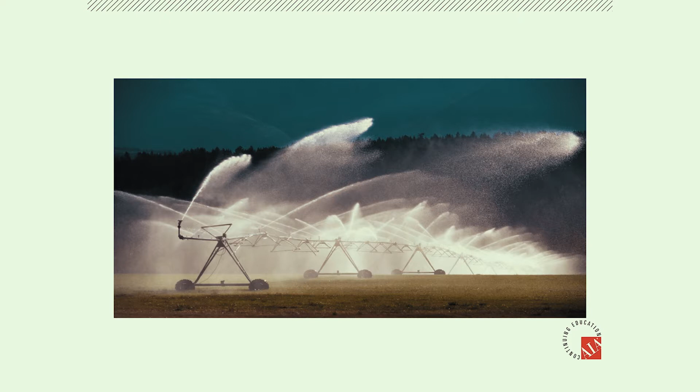Here we are, agricultural community all around Florida. We use water to irrigate our crops.

Hospitals, we've all been in hospitals. We use water for the hot water, for the cold water, for the heat, for the air conditioning. We use water as a tool inside a facility.

Universities, we've got dorm rooms, we've got kitchens, we use water as a tool in a university. High-rises, condos, apartments, coliseums - we use water as a tool in all these different types of facilities.

So now the question is, how much water do you use? We're going to look at a couple applications to bring you up to speed, to put everything in perspective of how much water we actually use.

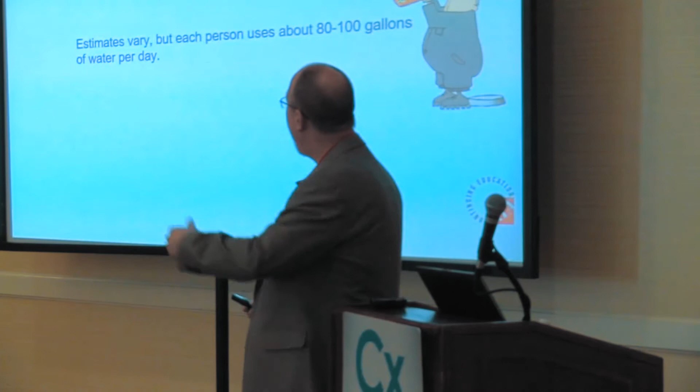The question I ask you is, how much water does the average person use per day? Any suggestions? 35? Anybody over here? How much gallons of water do you use a day? 100 gallons a day - it makes a lot of ice cubes. The average person uses 80 to 100 gallons a day. Bingo, that's a lot of water.

Gone to the grocery store, get a jug of water - how would you like to carry 100 gallons of water? Pretty hard. So in this case, 100 gallons of water per person per day is a lot of water.

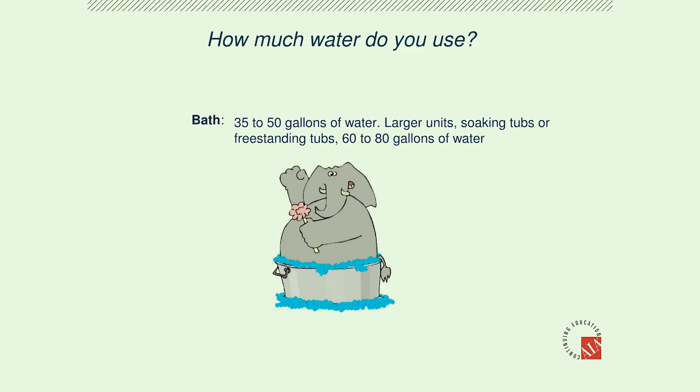Let's break it down to a few typical applications. I'm going to take a bath. How many gallons of water do we use to take a bath? Anybody over here, what do you think? Come on, Henry, have you ever taken a bath before? No? Oh. 25 gallons? Any other suggestions? 35? 35 to 50 gallons of water fill up the traditional bathtub.

You've got your hot tubs and your freestanding tubs - you can use a lot more water than that. That's a lot of water. Then the old argument comes in: is it better to take a bath or a shower?

Showing a shower there, the average shower is 5 gallons per minute. If you're in for 10 minutes, that's 50 gallons of water, the same as a bathtub. So it's all relevant to how long you do it, how much you put in there.

Now you can see why the hotels are putting in those water-saving heads. It's a tremendous amount of water that can be saved. I wouldn't use it at home, but in a hotel...

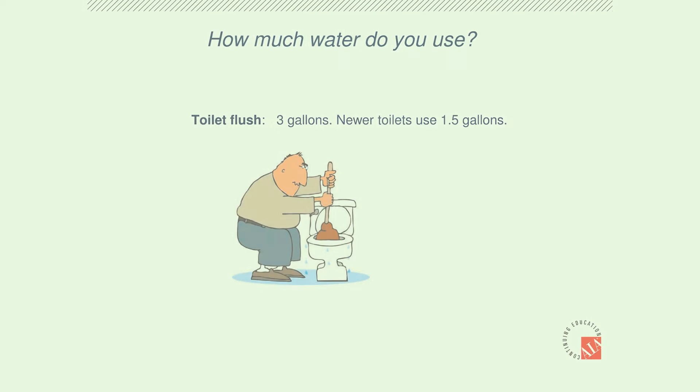So there's a shower. Now, if you don't use the bathroom to wash, you're going to use the bathroom for the toilet. Everybody flushes the toilet a couple times a day. How much is in the flush? How many gallons of water is in the flush? Depends on the age of your toilet.

The average toilet that you find today is about 3 gallons, and the newer toilets are 1.5 gallons - especially after a night going to Taco Bell there.

And then how many times do you flush it? I'm a couple flush - I like a clean bowl, then a couple after. That's a lot of water just from a toilet, all down the drain.

Well, the dog usually uses the toilet as a water bowl. The dog also helps out in the kitchen from time to time.

I have this argument with my wife all the time. She says it's better to wash the dishes by hand, we're going to save water. And I'll say, use the dishwasher. We got this brand new $1,000 dishwasher that does and sings songs, does anything you can imagine. Let's use that. She says, no, it's better. What do you think - dishwasher, washing by hand, what's better? Dishwasher? You're right.

The newer efficiency dishwashers use about 6 gallons, while some of the older ones use maybe 16 gallons. Washing by hand depends on how long you've got the water running, but on average, washing dishes by hand is going to take more time and use more water down the drain.

So we move off from the private sector into the commercial sector. You can see from up here, the commercial segment of the industry in the USA accounts for 17% of the public water supply in all those buildings we just looked at before.

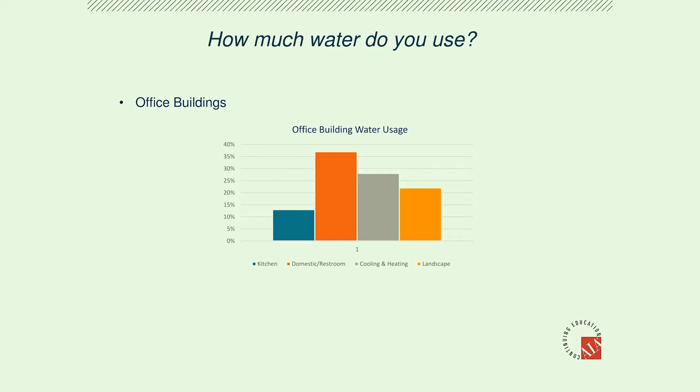Let's break it down and look at where they use water in these types of facilities. In an office building, they're using about over 35% in domestic and restroom use, and cooling and heating is over 25%. That's where all the water's going in most office buildings. Most people say, what water? There's someone in the restroom, maybe you wash your hands and get a drink. They have no idea what's inside the building.

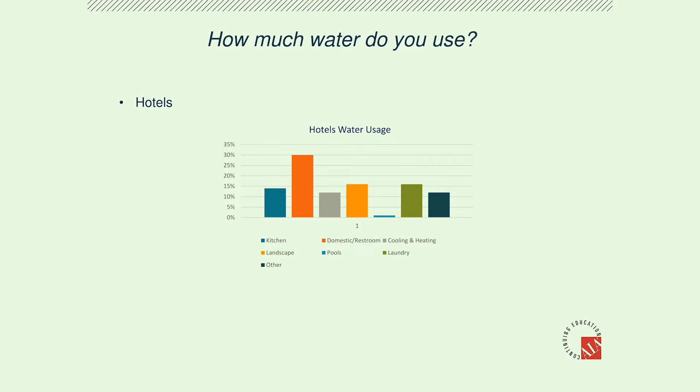Educational is a very new prime category that everybody in this room is spending a lot more time on, balancing and commissioning universities and educational facilities because there are a lot of energy concerns. And guess what, they use a lot of water. Most of it's domestic and restroom, some cooling and heating, some laundry there. They use a lot of water.

Henry asked, why is the percentage so high on cooling and heating when most of it is recirculated? The internet never lies, Henry. I don't know, that's a good question. A very good question. And that's why you're balancers, you're there to find out the answer to that question.

So the question we had, as Henry brought up, where's all the water going? Why do we need to monitor all the water? Don't we have enough water for everything possibly?

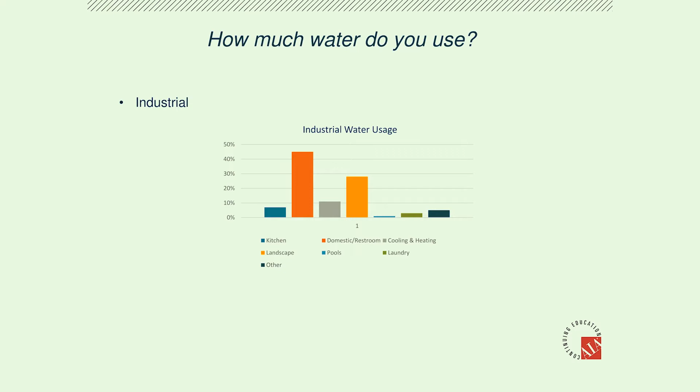Well, no, we actually have a finite amount of water on this planet. And basically, yes, it's recyclable. The sun heats up the surface of the earth, and all the moisture goes up to the clouds, and then when it gets cold, it builds up and it rains. It rains down onto the groundwater and back through the whole channels again. So you would think that's an endless cycle, but the rain in Spain falls mainly in the plain.

What if you're not in the plain? What if you're on the west coast the last couple of years? Although California's starting to have a little rain there, they didn't have rain for a long, long time, so they had a drought condition. So although it recycles, it may not recycle, it may not rain on your parade, so you may not get the groundwater you're looking for. You may have to bring the water in to where you're at. So the cycle is there, it doesn't affect everybody the same way.

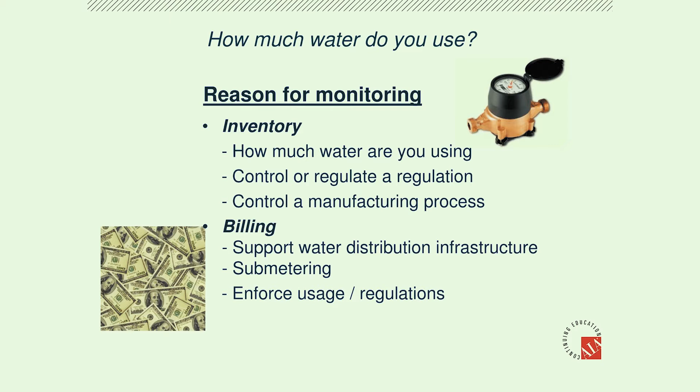So we need to monitor this for controlling purposes. We need to start drilling this down and look at some of the things that you do that affect your life. First off, we're basically taking an inventory. Remember we looked at that manufacturing plant at the beginning of the presentation.

I'm making tomato soup today, so I have a pipe of water, I got a pipe of tomatoes, I'm gonna mix them together. Wow, what's the ratio? I need to know how much water is going through that pipe. So we need to monitor how much water is in the pipe for inventory purposes.

How much are you using? There'll be some controls and some regulations in your own facility there.

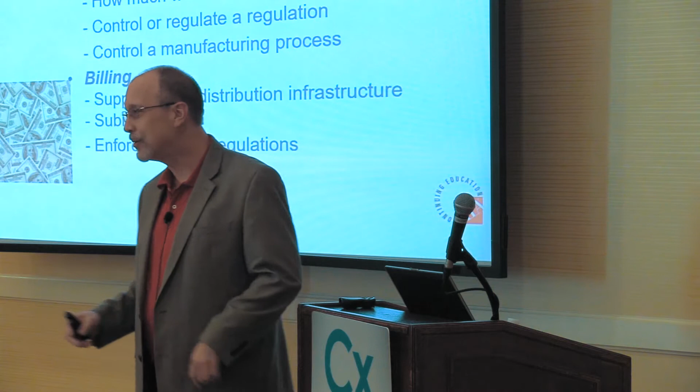Bottom line, why are we so interested in water? Money. It always comes back to money. Somebody gets it one way or the other. So we need to monitor water for billing purposes. For example, I've got to pay a water bill. Well, the water's free, isn't it? Well, it's not free. As you begin to think about that, where does the water come from? It comes from groundwater. They've got to pump it up. It's got to go to a water treatment plant. The water treatment plant's going to send it to a pump station. The pump station is going to go through some distribution network, and then you get your water. That's what you're paying for. The water's free. It's the ride from point A to point B. So somebody's got to pay for that, so there'll be a billing meter at the front door of your building taking an inventory. So money plays a role.

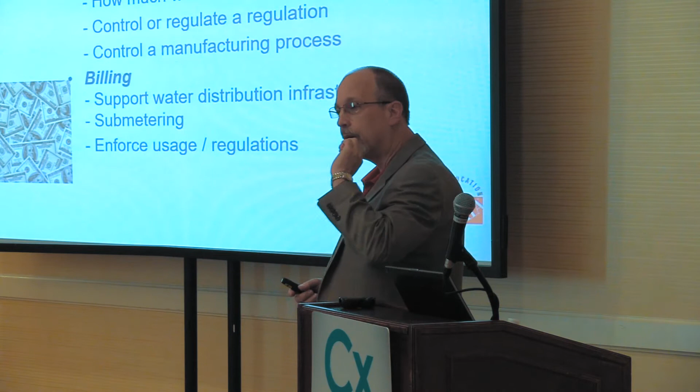So we have to support a water distribution system, and because of that, we want to share the wealth. Say I have a condominium. Well, one guy's not going to get the bill, everybody's going to get the bill. So now we have to have sub-metering on individual units. If we have a facility, a hospital, we're going to build this lab, the east wing, the west wing, we need to do individual sub-metering throughout the facility. So billing, sub-metering, and then bottom line, we have to enforce the regulations.

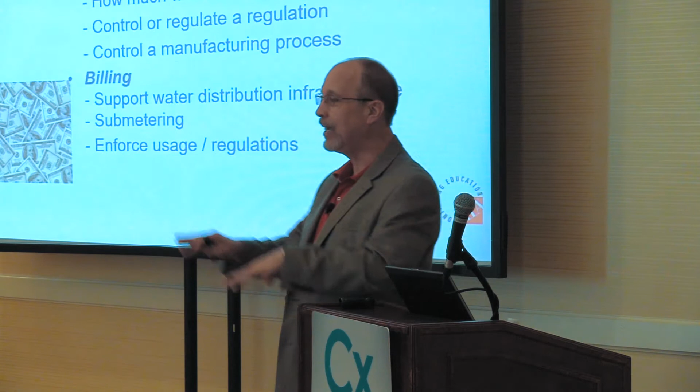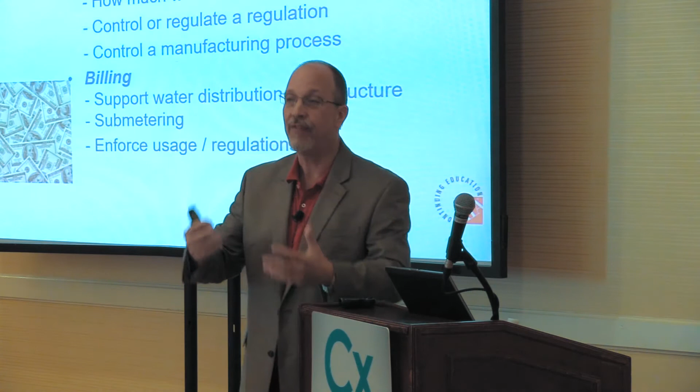When we don't have water, the rules get nasty. In certain parts of the country, here in Florida for example, a lot of people rent meters from us just to monitor their wells every year. Farmer Bob's got to have a $6,000 flow meter or hire somebody to come test his wells once a year. SwiftMud, the organization that administrates that, makes sure you don't take all the groundwater. If you go out west, we get calls from California all day long, a homeowner saying if I use over 300 gallons of water a day, they're going to turn my water off. There's all kinds of regulations because they don't have the water. So the less water you have, the more regulations and enforcement you'll have, and of course the more tools you will need to conduct that information.

So how do you determine the efficiencies of your current system? That's the biggest problem. People really don't know what they have. I'd like to do better on using water - what do you got? You might have a city water meter in there, but I don't really know the granularity within your system, how much water you're using.

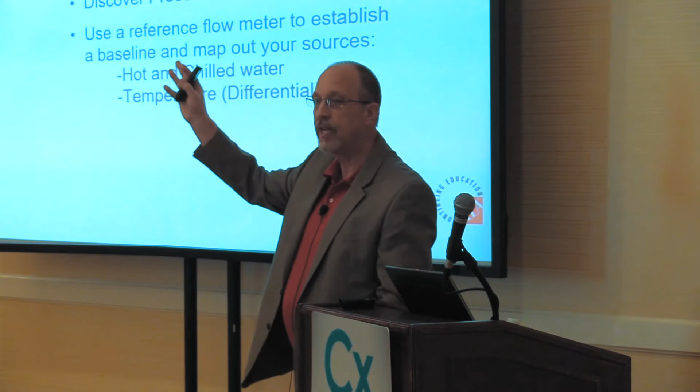So we have to go through a process which people are just finally adopting. It's called a discovery process. How much water do I have? Basically what we're going to do is map out an overall facility and look at all the different zones - this chiller, these sublines, each floor. We're going to map out the actual water usage through your process. You do that all the time when you're balancing an application. This is the big picture - everything from soups to nuts in the building. This is total water consumption of a facility.

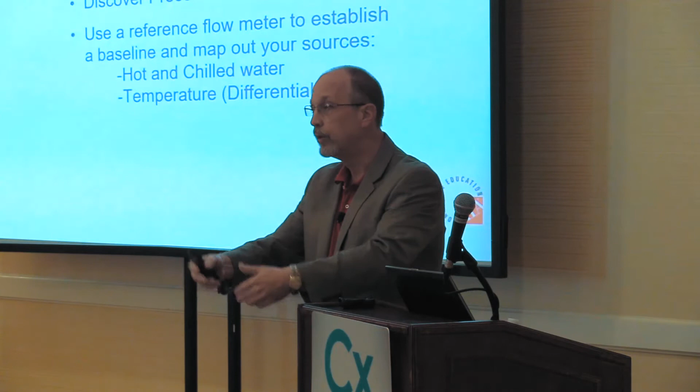We can monitor the hot and cold water, the water use, and in some cases the temperature for a BTU calculation - now we're looking at monitoring energy. As I mentioned before, the larger the facility, the more interested they are in water, which is a byproduct of energy, heating and cooling the water. So you have to have the tools to do this. We're going to talk a little bit about these tools.

One of the tools that I have been involved in uses sound and uses ultrasound.

So Henry, quick, give us a rap song. Okay, all right, that was it. That was our musical portion of the program.

Sound - a sound wave is a pressure transmission that's via either the air or water that's at a frequency that we can normally hear. We'll call that sound.

Ultrasound is at a frequency we can't hear, usually above 20 kilohertz. It's a high frequency we can't hear, but a dog can. Ever use a dog whistle? Blowing that all day long, you're not going to hear anything, but old Fido is really going to have a hard time because it bothers him. It's a different set of hearing than we have. So there's all different kinds of sounds.

The sound we use for measuring flow is ultrasound. The technology we're using today primarily is a clamp-on type device on the outside of the pipe. It sends an ultrasound through the pipe wall into the pipe, and it measures how fast the processed liquid is going. If we know the diameter of the pipe, we can calculate the volumetric flow, or the gallons per minute.

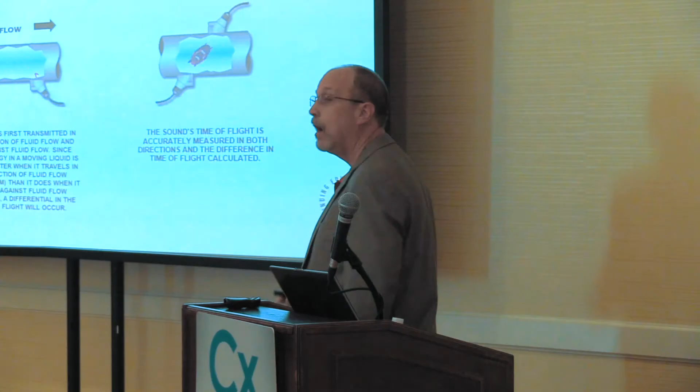Then we send a sound burst from here back to the other side of the pipe. Because it's going against the flow, it takes a longer period of time. It's like walking against a headwind - it's harder to walk against the wind than with the wind. So the faster the flow rate, the greater the differential of time.

Not to be confused with an ultrasonic Doppler flow meter, which you don't see too much today, but long ago. A Doppler flow meter kind of works like radar - it bounces off suspended particles. People in this room don't have suspended particles for HVAC-like applications. We use Doppler flow meters for applications with chunks of stuff in it, so we use it in sewage and sludge and oatmeal and paper stock.

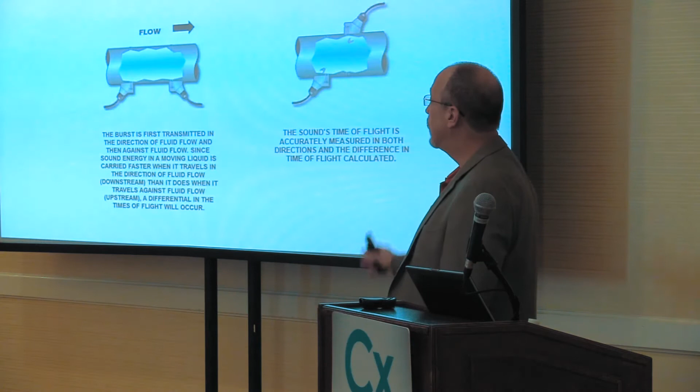Transit time flow meters need no solids whatsoever, and they work traditionally in applications that are ultra pure - deionized water, jet fuel, ammonia, liquid ammonia, potable water, drinking water, well water, glycol, sewage - but they don't work on sludge. They don't work on sludge because the beam would get blocked. That's the trade-off with ultrasonic transit time technology.

The transducer position here - you don't normally see this configuration with one on each side of the pipe because it's harder to do. So what we normally see is this configuration where the flow is going from left to right. We have two sensors on the side of the pipe, one sounding a sound beam and ricocheting off the back wall to the other transducer downstream. And then again, it sends a signal back here and here.

This configuration is traditionally called the V configuration, or in some brands, the dual path. There's other names for it as well, but it's basically two beams from here to here. We do this configuration because we're lazy - both transducers are on the same side of the pipe, so we can see the installation.

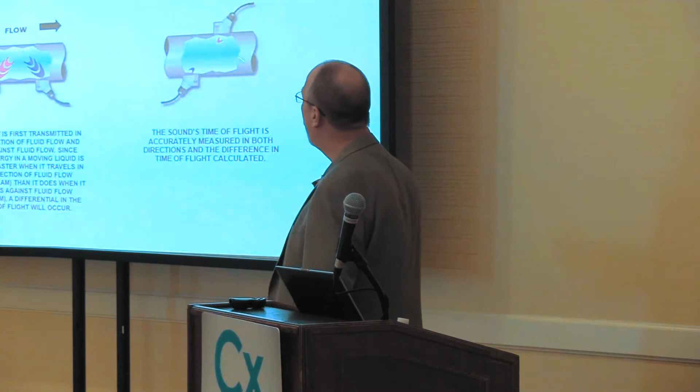Traditionally, this installation method is used for pipe sizes about 1/2 inch up to 24 inches. This configuration here, the single path, is more powerful. This is traditionally used on very large pipe applications, 24 inches and larger, or on applications that require extra power. So if you have that old 90-year-old crusty pipe that needs extra power that didn't work with the dual path, you might want to try this configuration because it's only got one path as opposed to the two-path configuration.

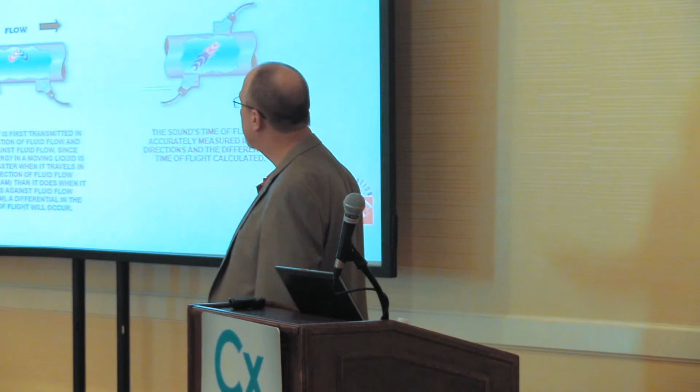So the transducer spacings are pretty much for the generic design - we'll look at frequencies later. This is the standard ultrasonic transit time transducer. Now the math of this equation is the same basic math it has been for 50 years. So as we look at this cutaway from inside the pipe, this is a transducer, this is a transducer. The novelty of a transit time flow meter - it's just a big math equation.

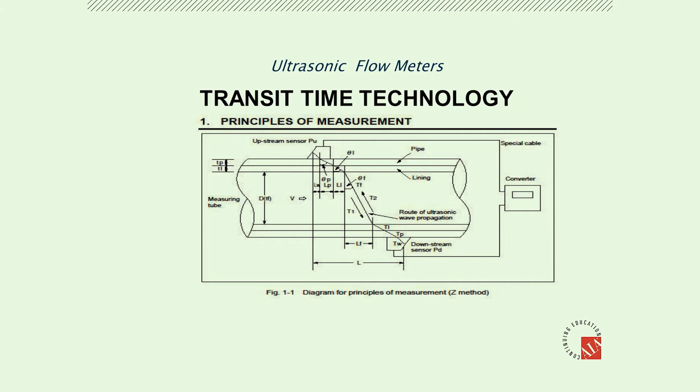That's all it is. In the old days, you had to do the math. Now today, it kind of does it for you, so life is easier. You don't have to dial in the specific sound speed of 32-degree water with 70% glycol - this kind of does it for you.

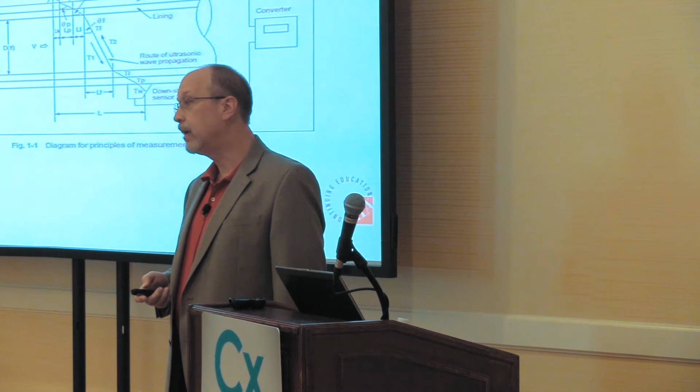So in this case, we have a transducer and the crystal inside the transducer is at a specific angle, and it differs from all manufacturers what that angle is. So you can't use a Dynasonics transducer with a GE flow meter. You can't use a Fuji flow meter with a Flexim flow meter, because everybody's got their own secret math equation there.

For example, the Dynasonics crystal is at a 33 1/3 degree angle. Why? Because it works specifically for them. The reason it's at an angle is it's got to penetrate the pipe at the least resistance at this angle.

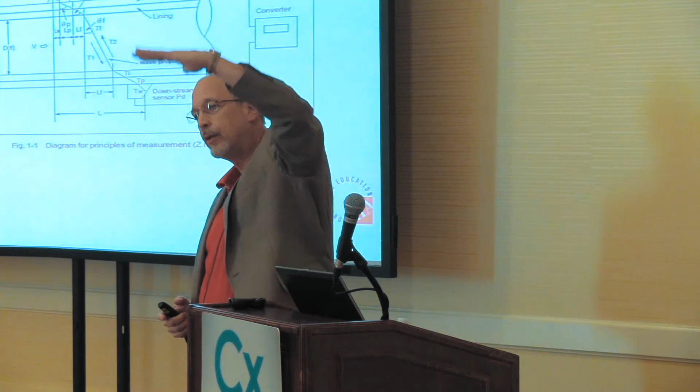So you remember the stories with the space shuttle coming back to Earth. It had to come through the atmosphere at a specific angle - it would either bounce off the atmosphere or come in too steep and burn up. It had to have a specific trajectory with the least amount of resistance to come through the atmosphere. We're using that same principle - the least amount of resistance coming through this pipe.

So we send a signal through the pipe wall. In this case, this pipe has a liner, so we need to know the sound speed of this carbon steel pipe. The signal comes through the pipe wall, and when it hits the process liquid, something occurs.

It's called Snell's law. You ever take a glass of water, put a straw in it, look at it sideways, and the straw looks kind of cockeyed, cut off? That's Snell's law - it refracts. So old Snell is factored into this equation. You need to know the sound speed of the liquid and the whole thing backs up. That's a lot of math.

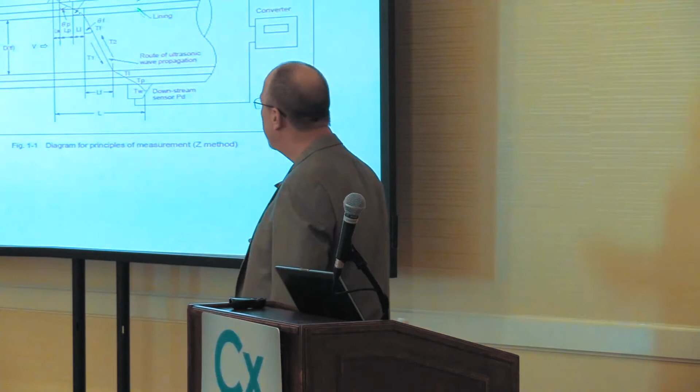In the old days, you had to put all that data in yourself. Today, you put in the data - carbon steel, 12-inch pipe, water - and it says move your sensors apart 2.3 inches, put it on the pipe. So the math is still there, still as laborious as ever, but just like your iPhone, the meter does it for you. Most of the newer brands will just have drop-down menus to give you that particular information.

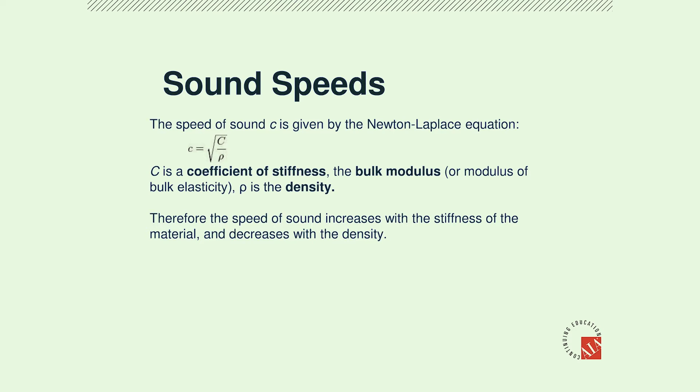Now, to calculate the sound speed, which the manufacturers have already done for you - so you want to do water, you click water, drop it down. You wanted to do oil, drop it down. You wanted to use fuel, drop it down. You wanted to use glycol, drop it down. All those things are pretty much in the memory of the flow meter.

If you have a new exotic chemical, then we have to do something special. We've got charts with thousands and thousands of sound speeds for exotic liquids that you guys would never see. But if Dow Chemical develops something brand new, we have to go backwards to calculate what the sound speed is. I actually have a guy at my office with a real big pocket protector who likes to calculate these things out in his spare time. Sound speed involves stiffness, bulk modulus, and density - we have to break down each individual product in the mixture to calculate this out.

The other part is some of the newer flow meters actually compensate for this if you have different liquids mixed. So some of the newer ultrasonic technologies, if you were to have water and 30% glycol - in the days of yore, you'd have to factor out the sound speed of the water and the sound speed of glycol and calculate the ratio. Using that method, the speed of water was 4,900 feet per second, and the speed of glycol was 5,400 feet per second. With a 30% mixture of glycol and 70% water, this would equal 5,000 feet per second, and you'd have to go in and type in 5,000 feet per second to get it to work.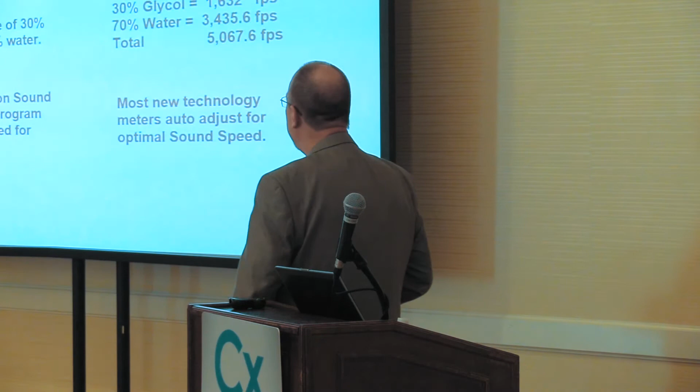Today, most of the newer flow meters, if you're plus or minus 10% of the sound speed, the autopilot on it optimizes it up or down. So 20 years ago, if you were off a little bit on sound speed, it didn't work. Today, it's lazy man time - you basically, in this case for this flow meter, just put in water and it figures it out. So the technology continues to get better and more efficient for you to work with. Some of the older models don't have this feature, but they're all heading in this direction.

Now, as part of the sound speed, we actually have to calculate out the bulk modulus - liquid is compressible. I've talked to you on the phone from time to time about having a hard time zeroing the flow. Most of the newer flow meters, you don't need to zero. The ancient flow meters needed it zeroed. All the new flow meters, no zero needed - the factory zero is just fine. The reason being, they reach such low flows.

If you were to close a valve here and close a valve here and put your flow meter on here, we have a jello effect. You can't see it, but the water is actually sloshing back and forth because it's a compressible liquid. Not as much as a gas, but it is compressible.

And so when we do the sound speed, we actually have to do a bulk modulus calculation. This is a calculation you will never have to do in your life. I've got a crazy engineer in the back room that does that for Dow Chemical applications. But that's how much math it is—it's all a math equation, nothing more, nothing less.

If you ever needed to do a zero check on an ultrasonic flow meter, you take a pipe, fill it full of water, put a cap on it, turn it sideways. That's how you do a zeroing test on a meter. But again, all the new flow meters made in the last 5 years or so, you don't need to zero them. They're pretty much set out of the box.

Now, every flow meter has certain requirements. Some requirements are—and I talked to a number of people at the show this week about this—how much straight run of pipe do I need? And if you don't have it, what's the price you pay? Generically speaking, and this is pretty much industry standard for ultrasonic technologies, I would love to have a flow profile that looked just like this.

This flow profile is faster at the center and slower near the pipe wall, this being a cutaway side of the pipe. So what we'd have here is these blunt and elliptical shapes from the different flow rates, the fastest in the center. It's much like a motorboat going down the river, with wake cast out to the side. Gravity and friction grab hold of the flow, depending on the type of flow and liquid—it'll be slower at the pipe wall and fastest at the center.

So what we want is the flow fastest at the center of the pipe. We call that a symmetrical flow profile. Regardless of how turbulent or what shape the parabola is, which changes based on the flow rate, we define that with a Reynolds number. We don't care about that. We care about this: if we were to draw a center line down this pipe, the top half equals the bottom half.

This scenario occurs on a water-like application when I have 10 pipe diameters after an elbow, put my sensor here, and 5 pipe diameters before another elbow—or the traditional 15 pipe diameters of straight run of pipe. That's also based upon flow rate, based on 10 feet per second. Most people size a pipe and pump around 7 feet per second—that's the industry standard. You'll see high and low from that, but that's pretty much the case. Sometimes in a municipal application, we'll oversize the pipe.

Now, if I don't have enough straight run of pipe, we call the application turbulent. Turbulence is actually defined by Reynolds numbers. Turbulence is when you don't have enough straight run of pipe. We call it an asymmetrical flow profile.

What you have here—the flow comes up your elbow, it rolls after this elbow, and right at this point, because this is a shorter distance and this is a longer distance, it looks like a washing machine right there. So if you were to put a sensor right there, most likely the sensor wouldn't read at all—it would fault out. Now, as you move farther down past the elbow, we get into the fuzzy areas.

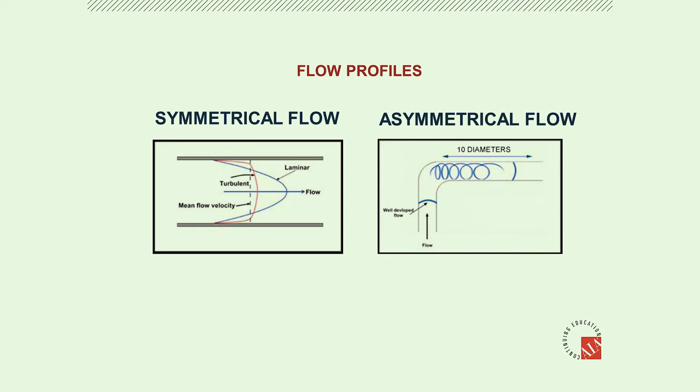So here's the 10 pipe diameters—if I was to put my sensor right here, I'd have a good application. If I was to put my sensor right here, what would happen? You may have excessive turbulence and the math may not work. So you may have to profile, move your sensors to actually catch a signal. That can be problematic and can affect the overall accuracy of your device.

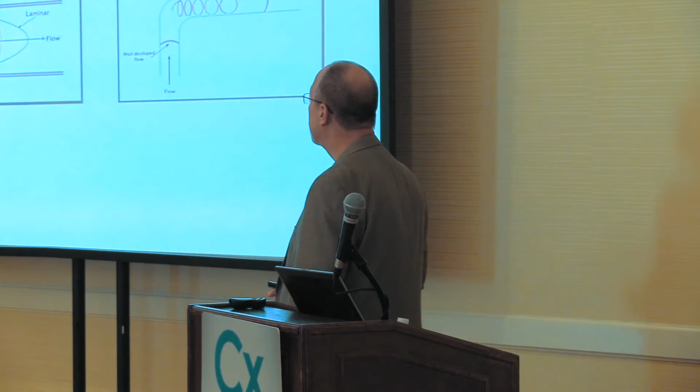Well, I just happen to have a flow profile. And as we mentioned before, it's all a math equation. So before this guy even goes on the pipe, I know where the transducers go. I've got this 10-inch carbon steel pipe. I program the meter with the pipe outside diameter, the pipe wall thickness, the pipe process liquid, and it tells me to move my sensors apart this distance. We turn it on—boom, they all connect. Perfect. The device is 1% of rate with the factory specified.

Everything's perfect, but what if I don't have enough straight run of pipe? My flow profile changes, and if my flow profile changes, I may measure one flow rate at a given point, but the flow moved, the profile moved downstream or upstream. In that case, I'd have to move the sensor to catch it, but that's not the spacing the flow meter told you to move it to. Now you're out of math.

You are... it's 5:30 on a Friday afternoon. Brent, how can I just make it read something? I'll take that.

That happens all the time. You guys are in the field, faced with difficult situations. I don't have enough straight run of pipe, what can I do? If you're point sensing, you can move the sensor around a bit. If you go a quarter inch or half inch left or right, in most cases the device is rated to be about a 1% device. But many times when you have to move the sensor, you're no longer at the optimum accuracy specification. Everyone asks, how far off could you be?

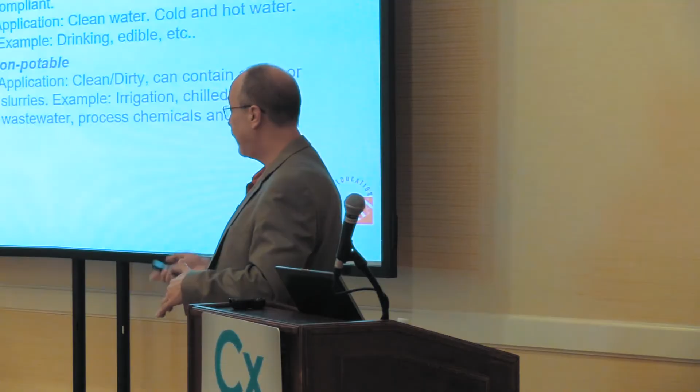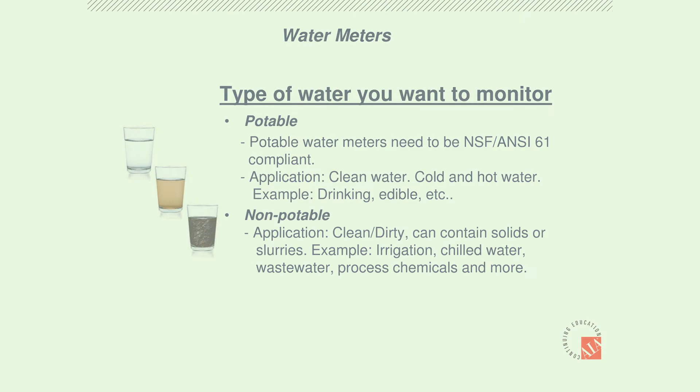Now as far as an ultrasonic flow meter goes, you might say, well, I can look at this -- this looks like potable water. But you've been in Florida today, sometimes potable water looks like this. Opaqueness has nothing to do with it. Opaqueness is just dissolved suspended solids; there's nothing floating in there, it's just the coloration of the water. Over here, this is what we call a slurry -- this is a cup of mud. And a cup of mud is not really going to be very good for your particular application.

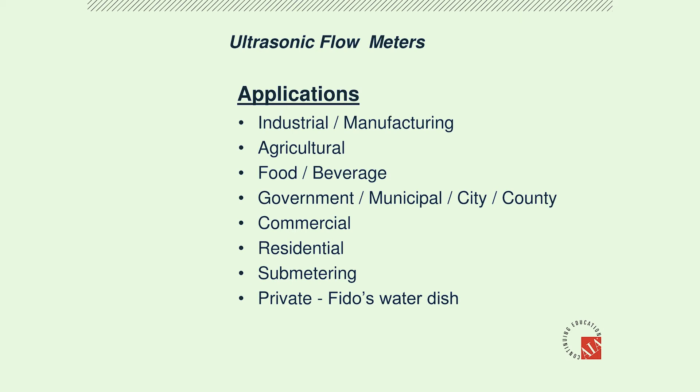So where do we use clamp-on ultrasonic flow meters? We use ultrasonic clamp-on flow meters for just about anything that's got water in a pipe. We use it for agriculture, industrial, food, all kinds of building, commercial, residential, sub-metering, and we also measure the water to Fido's private water dish when he's not drinking out of the toilet or the dishwasher.

So how do we use this tool? It's a portable device, and it's also dedicated, but the people in this room primarily are going to do a couple things. You're going to balance an application, commission an application, or do a discovery process - how much water am I using? There's all different levels there. We're going to look at some of these out-of-the-box applications coming up.

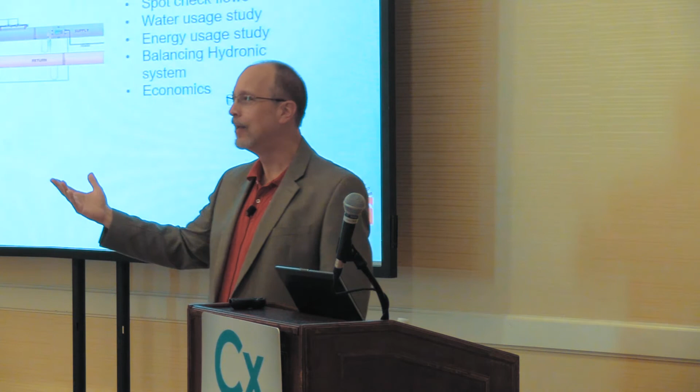So step one, we need a device that you can walk around with. The big technology change from years ago is you used to have these big, giant black box suitcases you had to carry around. Now they look like the size of a big - I'm dating myself - transistor radio. I talked to my daughter the other day, I need a transistor battery. She says, what's that? It's just a 9-volt battery. She said, what's that? So things have evolved over time. There's no more transistor radios, no more transistor batteries.

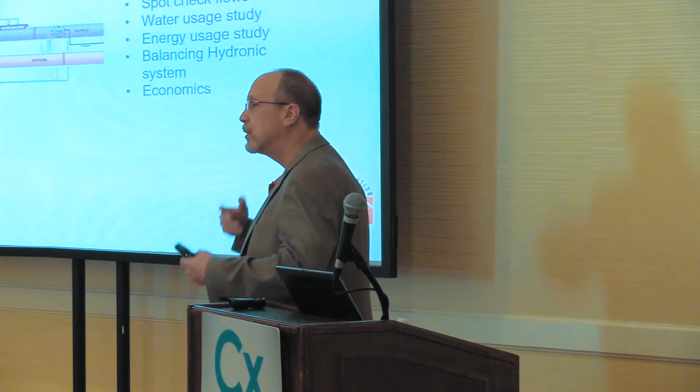Portable flow meters are ideal because they're spot checkers. Flow, balance, commission - whatever you want to do, you can put it on, set it up, and collect information very promptly. Or if you want to leave it there to do a study, you can clamp it on, go away for a week and come back and collect the data. It's all non-invasive. You can add energy to the equation - you can put temperature sensors on there and measure temperature as well to calculate BTU.

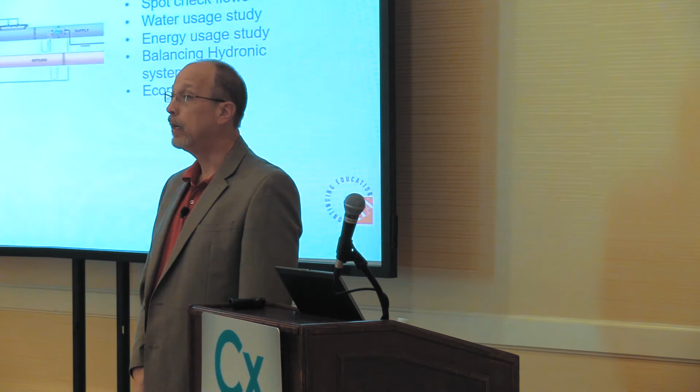And what's really interesting about it is the economics of the situation. You can go out and buy a portable ultrasonic flow meter, and they range all over the place. Most of the ones that meet your requirements are about $6,000 and up to buy a portable meter. Or you go online, click, and rent one for the week - you rent one for $600 or $700 now. So the economics for you to get a hold of this technology, there's no problem anymore. It's not money anymore. You need to find the need to use it.

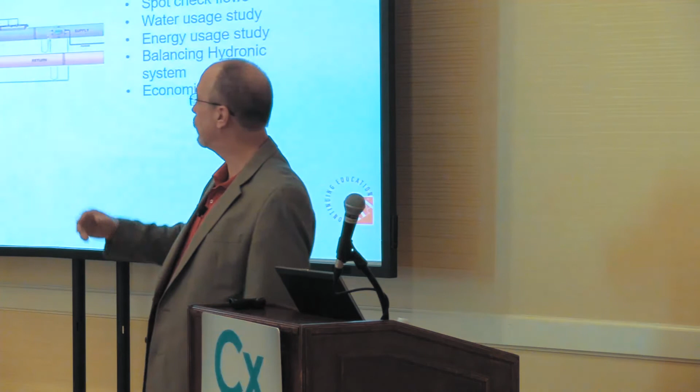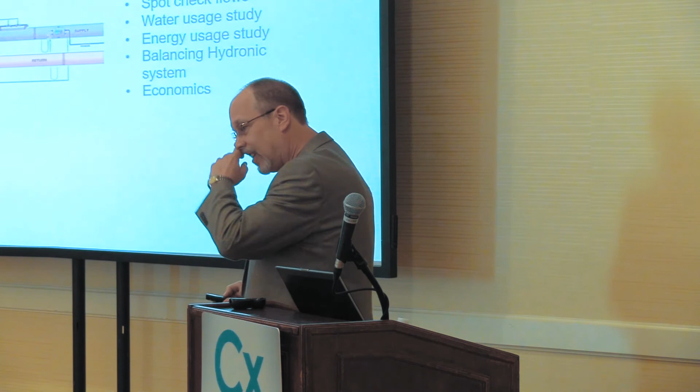And the technology to use this - most of the manufacturers that make this stuff have simple startup instructions, 1 or 2 pages. You don't need to read the 300-page manual about the diagnostic screens to monitor how much city water you have coming in or to balance a pipe. That's additional information not required for a typical installation. So Pete the plumber can use this technology after 5 minutes of orientation, and he can do the orientation himself. It's not a complicated beast, so the whole technology's evolved to a commodity item. And once it becomes a commodity item, there's more players in the game, the prices are more competitive, and it's user-friendly. If it's not user-friendly, you move on to a different technology. So the portable device is key.

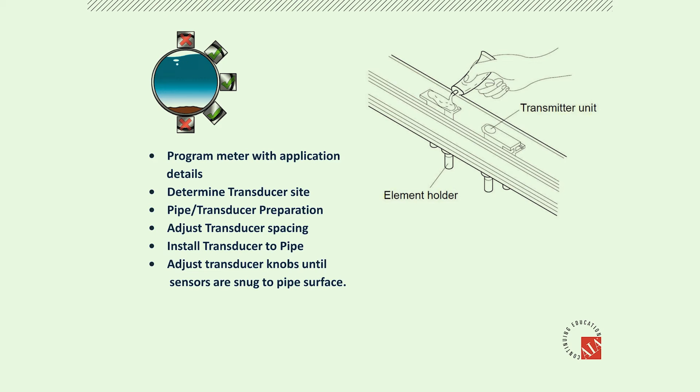Now, installing the portable device, the most common question I have is, why do I have to put grease on the face of the sensor to read through the pipe? Well, I was swimming in the lake the other day, and my friend was off in the distance in his motorboat. I could hear him off in the distance. Then I dove underwater, and all of a sudden it sounded like the motorboat was right on top of me. And that's because sound travels faster through a liquid than it does through the air.

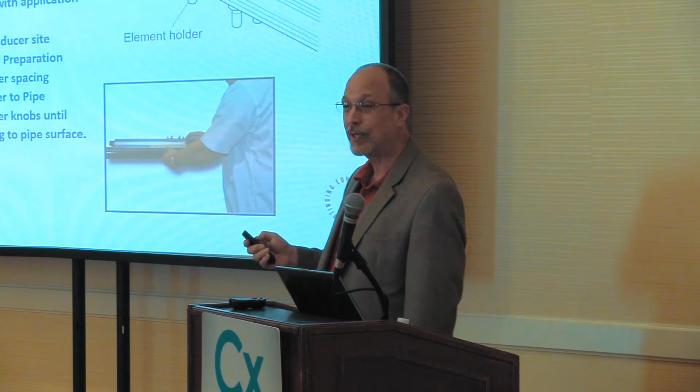So we put a little acoustic couplant, as we call it - or schmooey or grease or all kinds of things we call it - put it on a transducer. How much do you put on the transducer? The transducer is flat, the pipe is round. We just need some form of mechanical contact, and what we'll put on there is like toothpaste on a toothbrush.

To prepare the pipe, use a rag or a wire brush. You don't need to take the paint off anymore, but you need to remove the insulation. Just get to the pipe itself, knock off anything that's loose, and you can put the device on the pipe. For a portable device, open it up, put it on, get your data, close things back up. On a dedicated application, you can put the transducer on the pipe and cover it back up. Doesn't make any difference—you can re-insulate the application afterward.

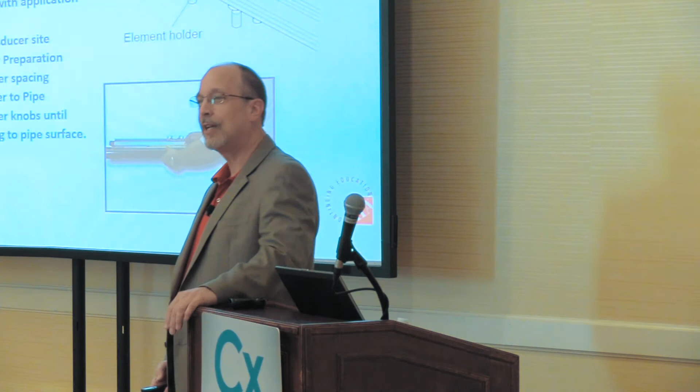There's all different flavors of grease. I'm the grease king for ultrasonic flow meters—we have 10 different flavors, just like Howard Johnson's.

The best all-around grease to use is a silicone grease. It will stay on the pipe under all conditions—if it's really cold, really hot, or really sweaty. When you take the insulation off the pipe on a warm day like this, you'll get moisture on the surface of the pipe, and the silicone grease will work through that. Some water-soluble greases, which we also have, come in a little squirt bottle—your hands stay clean and you can wash up when you're done, but put it on a wet pipe and it's gone.

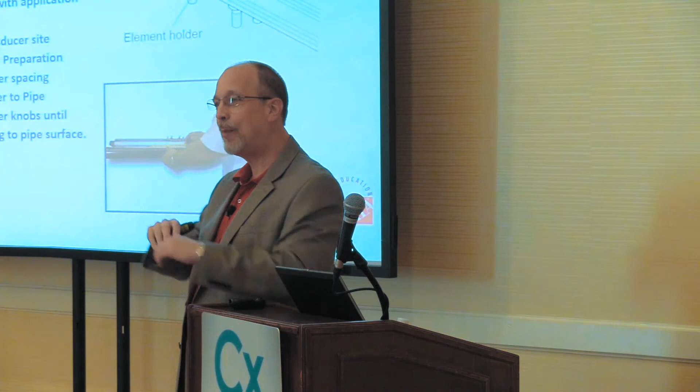Put it on a hot pipe, it's gone. Put it on a pipe with a lot of dust or rust, it's not there. So it's good for certain applications—definitely short-term, not long-term. For long-term applications, a silicone grease is better. If you have high temperature applications, there are high temperature greases as well.

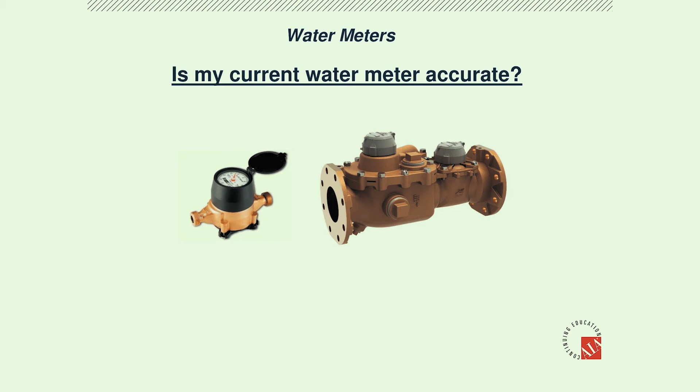Water meters—is my current water meter accurate? It's the most common question in the world, and we get it again and again. We try to screen out residential people. Someone will call up about a $100 water meter bill all the time, saying, I don't believe my water meter, this bill cannot be right.

The first thing I'll say is, did you have the city come out and replace your water meter? They said yes, it was 20 years old, so I told them to replace it. My bill went up—can you imagine that? All mechanical water meters, the older they get, the lower they read. So don't replace your old water meters, that's always the first key clue when I hear the water bill went up.

Nine out of ten times, the water meter—even a new one—is designed by AWWA standards, so for the most part they're right. I'm sure their computer reading could screw up every once in a while, but nine out of ten times there's nothing wrong with the water meter. You very likely have a leak or something in the line if there's a major discrepancy, or somebody moved the decimal point when calculating your information.

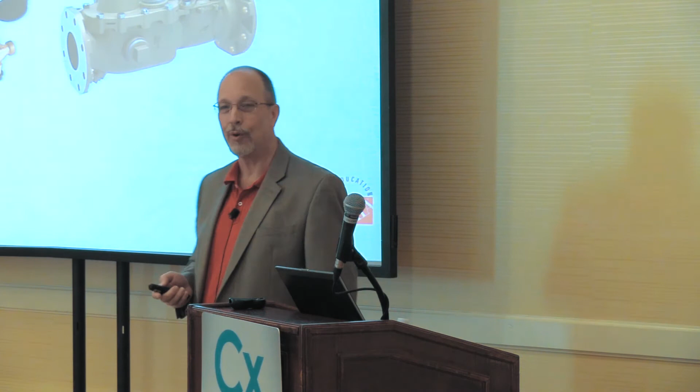But there are different kinds of water meters. There's a water meter on the outside of your house, used for smaller line sizes. This is a big boy here—this is what's in the front of this building. This is called a compound water meter. A compound water meter is actually two water meters.

We're going to look at this next, because it makes a big difference, especially with an ultrasonic flow meter in your survey work. So we have this big hotel, and I'm in the basement, and we got a 10-inch water line, and he wants us to monitor against a city water meter. So we go into the basement, throw the meter on this 10-inch line, and he says, I'm going to go upstairs and turn the water on, and you measure how much we got. No problem.

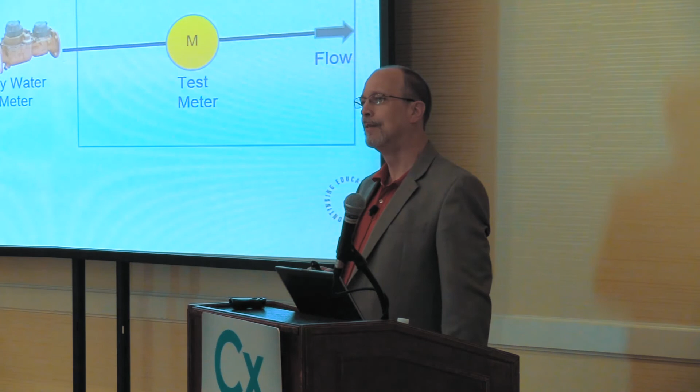He comes back and asks, how much did you see? We said we didn't see anything. He said, well, let me go do it again. Comes back down to the basement, still don't see it. He says, I flushed it twice, how come you didn't see it? He flushed the toilet, which was 6 gallons, in a 10-inch line, which equals something like 0.001 feet per second. I can't see that—it's too low of a flow rate.

So what do you do? Well, you use this meter—this is a city meter, and it has two flow meters in it. It has a 10-inch turbine flow meter, and it has a 1-inch turbine flow meter sitting on the side of it—it's got a sidecar.

So what happens on the real toilet flushing days, it goes for the 1-inch line, and when I've got a heavier flow, it's got a flap, and it flips over to the 10-inch line. It's not a 10-inch meter, it's a 1 and a 10-inch meter.

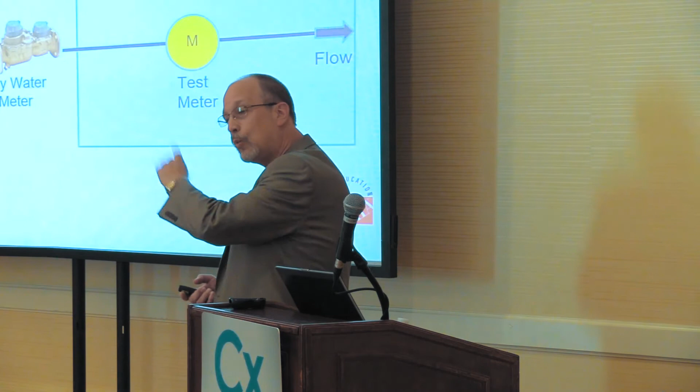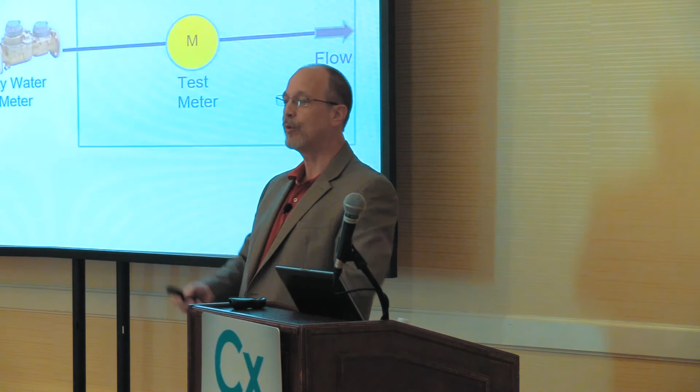So when you go to do the flow survey to check the city water meter, you better make sure that if it's a compound water meter, you have an ultrasonic flow meter that reads down to about 1/2 foot per second. You can calculate that out based upon whatever line size it is. Some brands you can go as low as 1/10 foot per second, but you're not going to see a toilet flush in a 10-inch pipe. So something to watch for - every flow meter has a minimum flow rate, just like an ultrasonic flow meter.

Now, when we get inside the building, what's become very popular is sub-metering. We got a meter at the front door, we got a meter at the back door. And the first thing the city will say is, we don't have a meter at the back door, so whatever we put in the front door, we're going to charge you for what goes out the back door.

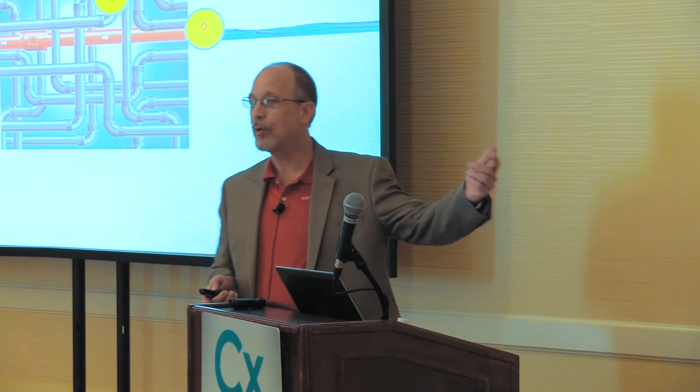So everybody gets a bill for the gazinta and the gazada, whether you have a defined gazada. And the problem is, if you have things going on inside this facility, like manufacturing a product and reusing the water - say maybe a car wash situation, and that Chevy pickup truck just drove away with 40 gallons of water in the back of it, and I'm recycling it. My gazinta doesn't equal my gazada, so we have to have individual sub-metering to find out the individual zones. So more and more people are asking us to monitor the effluent facilities.

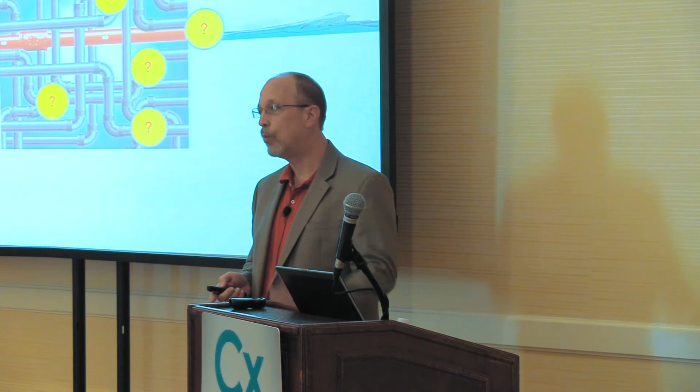In some cases it's difficult because there's partially filled pipes, so there's different flow meters and different technologies for those particular applications. Sub-metering is the key, and that's where you, the balancers and commissioning people, will see a dynamic upsurge in sub-metering applications. Why? Because the price of meters is going down. You can buy a dedicated ultrasonic meter for about $2,000 now. It's replacing the paddle wheel flow meters in the marketplace right now. And for that reason, you're going to have zones all over the place - more things to balance, more things to check, more applications for you to look at.

Now, when you do your sub-metering, what are you going to do with the data? So if you do your testing, you need to harvest your data. Most of the newer technologies all have data loggers on them, so you can store your records on your flow meter, and in a lot of cases you can download it. Some meters now have SD cards so you don't even use software cables - they save it as a CSV file, put it in your laptop or PC, turn it into Excel, and there's your data.

My favorite application - this is what we've done all day after drinking all that coffee, we visited the restroom. And I have had more calls from balancers in the last couple of years on waterless urinals than from anybody else. Now, you know how to balance, you know how to commission - guys, gals, it's a water meter.

So what all the rage is about is let's see how much water we can save. First thing is justification, because in order to install this, it's a major renovation to the building and the plumbing system. It is not an easy retrofit. So with that in mind, it also has to be done right. There's nothing worse than a waterless urinal system that does not work.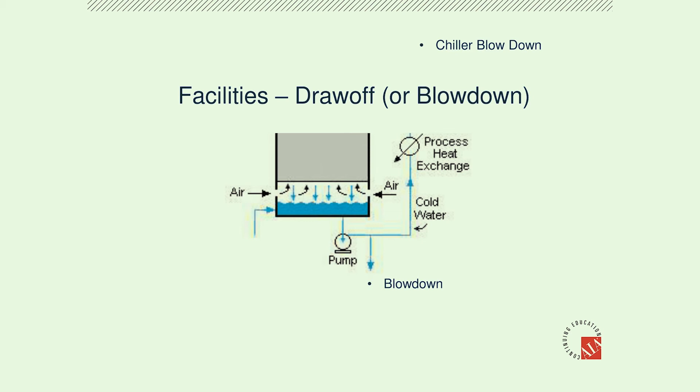Chiller draw off, or blowdown. Now the blowdown is basically the part of the system that recycles and gets all the dirty stuff out and replenishes it with new stuff at the same time. No big deal, we've been doing that for years. All of a sudden somebody wants to measure it because it's going to the sewer. So either the facility wants to measure it, or in a lot of cases the municipality says how much you're sending to the sewer.

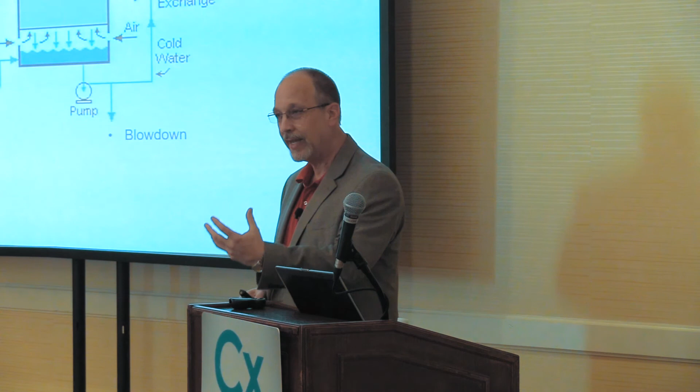This can be a simple or a very difficult application, because when the blowdown comes down it's usually in an oversized line, and it comes blurp, and the pipe's usually not full. Very difficult application to measure blurps.

So what do you do? I've done the exotic answer and the simple answer. The simple answer is put a trap on the line. You've got a full pipe. Once you put a trap on the line, just like under your sink, raise a little end there, you still have enough head pressure to push it through. You have a full pipe then over here.

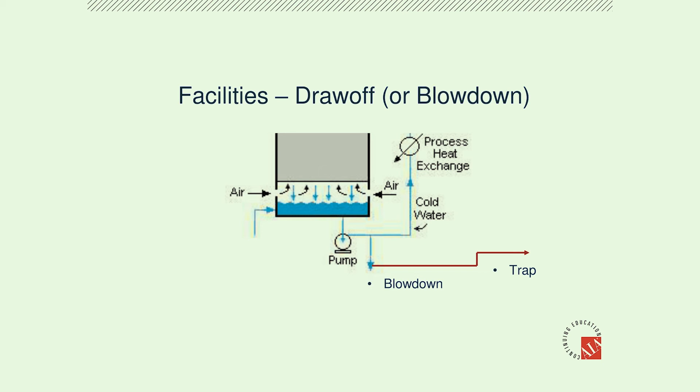So when you have a full pipe there, you can put an ultrasonic flow meter, a paddle wheel flow meter, a city meter, a mag meter, you can put all kinds of meter there. Put the trap in the line here.

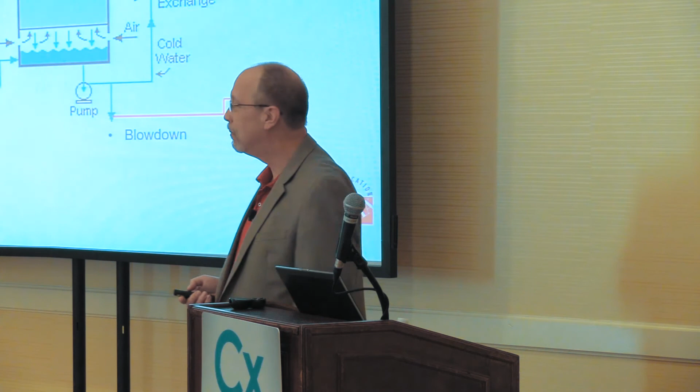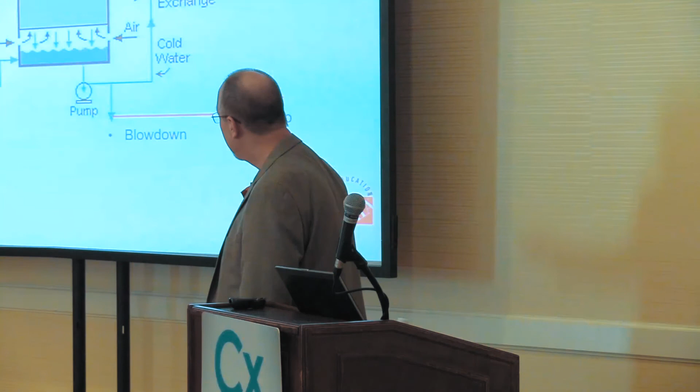We just did a project on top of the CNN building about a year ago. They didn't like the trap. We built for them exotic weir boxes with ultrasonic level sensors on top of the weir box. We made it into a wastewater application. How exotic does that get? They didn't believe in the trap scenario. But you can spend $10,000, $20,000, depending on the material, if it's PVC or carbon steel, a little bit of plumbing will do you great.

Very popular application. Put the trap on the line, you'll be the hero. Many, many facilities now are doing this for economic reasons, and many municipalities are requiring it as a very popular application.

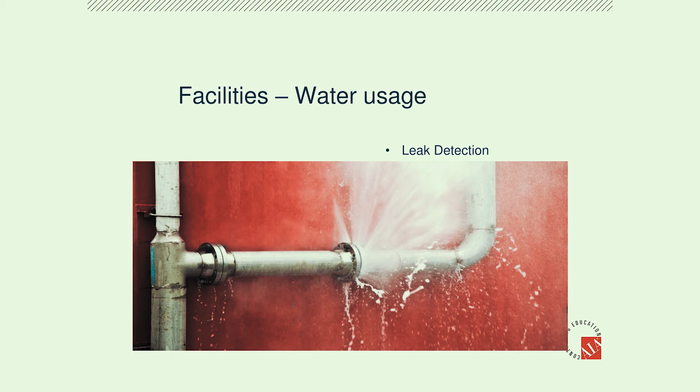Well, what does this look like? My saying goes there's nothing better than a good leak. Well, this is a bad leak. Billions of dollars are spent every year in water losses due to leaks. The insurance industry is going gaga over it.

In fact, many facilities now require flow metering primarily just for leak detection because the costs are just out of sight. We did one thing, put some meters in recently, I believe it was in DC, the National Geographic building. They've got hundreds of buildings there, hopefully there were no mummies in the basement. They said a leak started about Friday afternoon and they found it Monday morning. The basement had 10 foot of water. Guess what, they put flow meters in after that. But that's a very expensive what-if, and they had no leak detection.

So what they're putting is flow meters in primary lines, and they're either tying into the building automation system or tying in a direct line that has a low flow cutoff or a high flow cutoff. If something's unique, someone gets a phone call, an alarm goes off. So leak detection primary, brand new giant application, sponsored by the insurance industry.

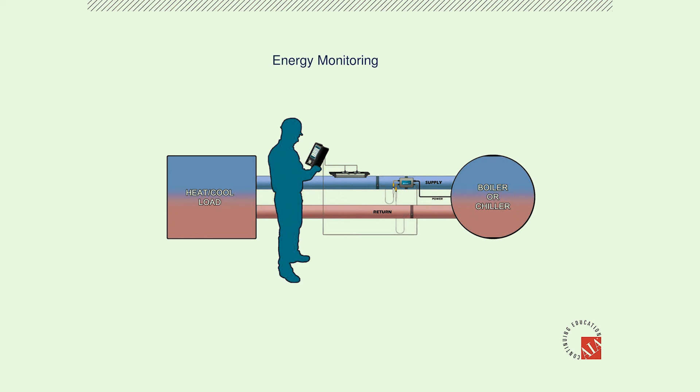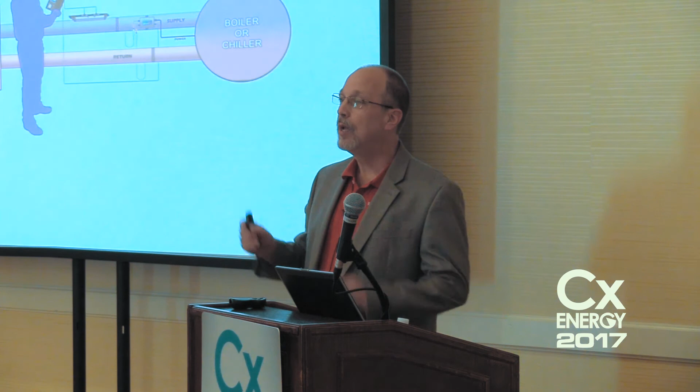By adding temperature to the system here, we're looking at temperature differential. We can do this with a non-contact device. We know we're not going to get the exact temperature inside the pipe, but the key here is temperature differential. And when you buy a system that does temperature differential, make sure they're accurate as a complete system.

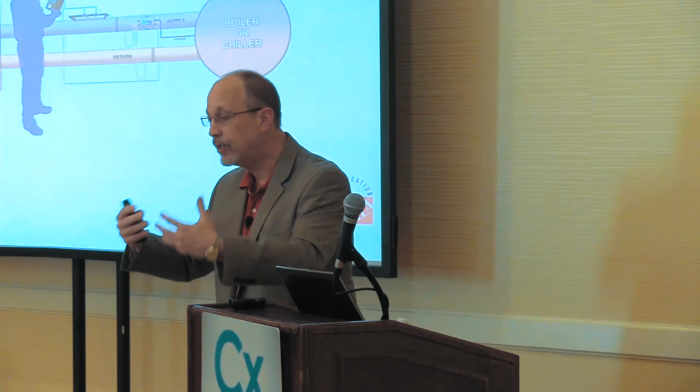If you're greater than 1% temperature differential, you could be as much as 20% off on your BTU calculation. So you can't look at temperature or energy management on a haphazard method.

You have to have accurate, matched temperature sensors and install them in the same location. If I put both temperature sensors at 3 o'clock, they're matched and calibrated and won't have a temperature differential. If I put one on the bottom and one on the top, heat rises - you could have a temperature differential just when you start the game.

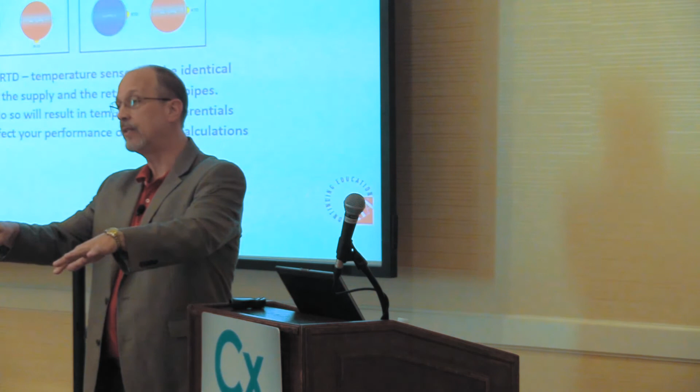BTU monitoring has become very popular, and most meters you already have, you can add temperature to those devices there. But add what the manufacturer recommends. Don't go to a catalog house and buy a thermistor or thermocouple and make your own kit, because they're not going to be accurate enough to give you any intelligent data.

Dedicated ultrasonic flow meters were primarily used in sub-metering applications. Why? Because the prices are getting so low. You can buy a dedicated transit-time flow meter for about $2,000 now. The price of a paddle wheel flow meter is about $1,500 to $1,800 without any communications - and you have to put a hole in the pipe and service it. The ultrasonic flow meter just became less expensive than a paddle wheel flow meter.

The ultrasonic flow meters are 1% of rate. Most paddle wheel flow meters are 1% of full scale - so ultrasonics are already more accurate than that. If you're going to do an energy application, it'd be foolish to put an invasive device because you can go clamp-on, cheaper and more accurate.

Many of the devices, if you want to use the customer's existing RTDs, you can tie directly into the energy unit itself. There are all different brands and shapes and sizes, and some of the key people are represented here.

Are there any that are wireless? Any that are what? Wireless? They're just starting to come wireless now. We can add radios to it. The next generation of dedicated meters are basically going to be less expensive wireless.

Right now, round one, you can get a variety of communications like Modbus, BACnet, Ethernet. We add radios to it, but the radios aren't really cheap yet. We have the first versions of Bluetooth just starting to come out, but Bluetooth doesn't go very far, so you've got to have repeaters.

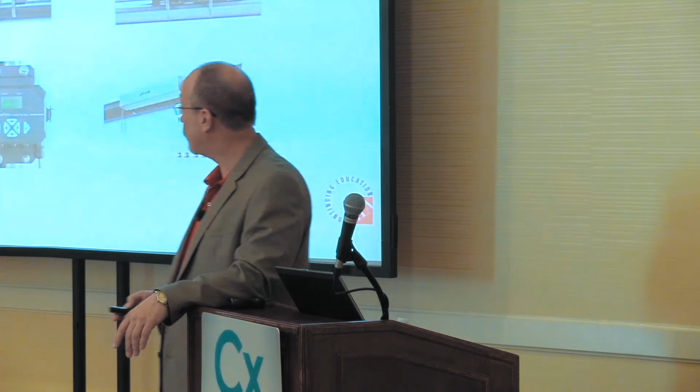The next version out is cellular. We've been working with cellular because then you go around the network system where you don't have to worry about screwing up anybody's existing network system. So things are coming - here's some of the new ones, as Henry brought up again.

We're using Wi-Fi networks, and eventually they'll have some consumer stuff coming out that you'll put in your house to monitor your home performance. You'll buy it at Home Depot, and it will transfer with your network to the cloud. These are going to be out in the next year or two, and you'll be able to buy them for a couple hundred dollars.

The difference is they're not accurate enough for you to use in your technology, but this tells you where the world's going, because the people behind this are the insurance industry, not the flow meter people. They're making it more of a commodity device. So the technology is going, and at some point you'll be able to go to the cloud to download your data, or your iPhone.

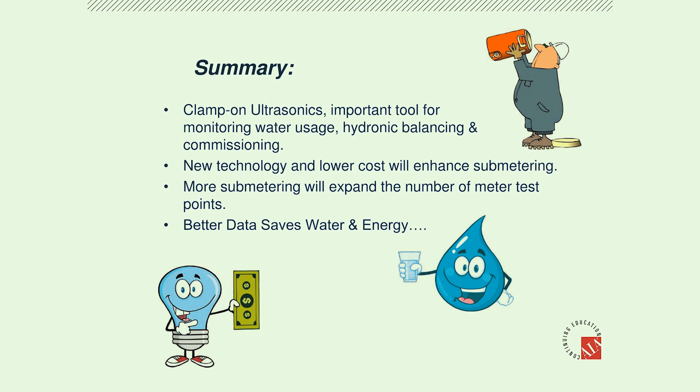So we talked about flow meter technology today. We talked about where your water is today. We talked about ways to save some energy and save some water. So there are two things I want to leave with you. One, thank you for not pulling the fire alarm to break up my speech like the guy this morning.

Appreciate that. And the second thing: next time you go wash your face or get a drink of water, stop and think. Go back and say, where did this water come from? It came from the groundwater, pumped up to the surface. It went to a water treatment facility, through some pump stations, some infrastructure, and by magic, you turn this faucet and you get this cup of water. Aren't we fortunate to live in a time and place to have something like this?

There are other parts of the world that do not have this type of infrastructure to support that. So thank you very much for our presentation today.